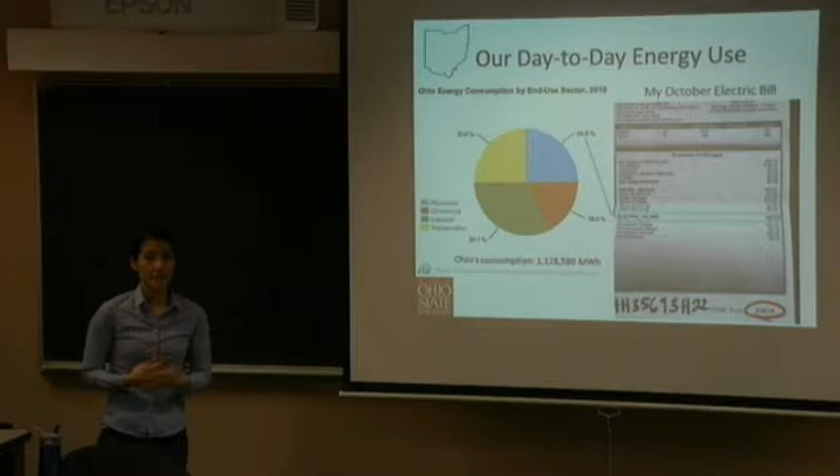And so this is my electric bill from October. And I had just moved, so it jumped from $20 to $127, right? But the key point of this is to look at the 461 kilowatt hours that I spent for the month of October. And so this is for 1 month, then you multiply it by 12, so that's roughly 10 times that. But then you do it for every person in this room, then every person on this campus, and you can see where I'm going with this, is that our energy consumption is growing and growing, and our demand is continuously growing with every person consuming energy in the form of electricity.

And this only makes up a small part of our Ohio energy consumption in terms of residential use. So then we have to take into consideration the transportation, the industrial use, and the commercial use. So in a given year, for 2010, we spent over 1 million megawatts. So megawatts versus kilowatts of electricity, right? So this sort of puts into perspective our growing energy demands. And so how does coal play a role? In Ohio, we predominantly generate electricity using coal.

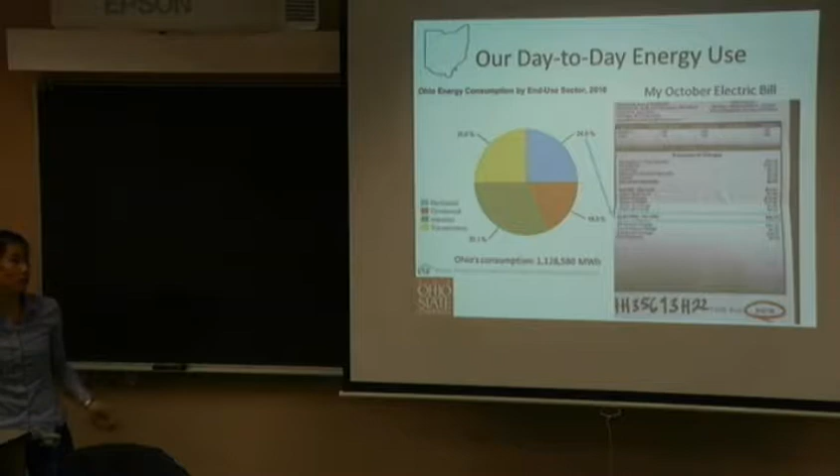And so this brings us to coal. The US has a long history with coal, with the development of the steam turbine, and basically that sparked the Industrial Revolution. Coal has been heavily used in the US. We are the second largest producer of coal after China, and currently we have a lot of reserves. So another key aspect of coal is that we have a lot of reserves, and this means that we can actually be energy independent if we make use of our coal reserves.

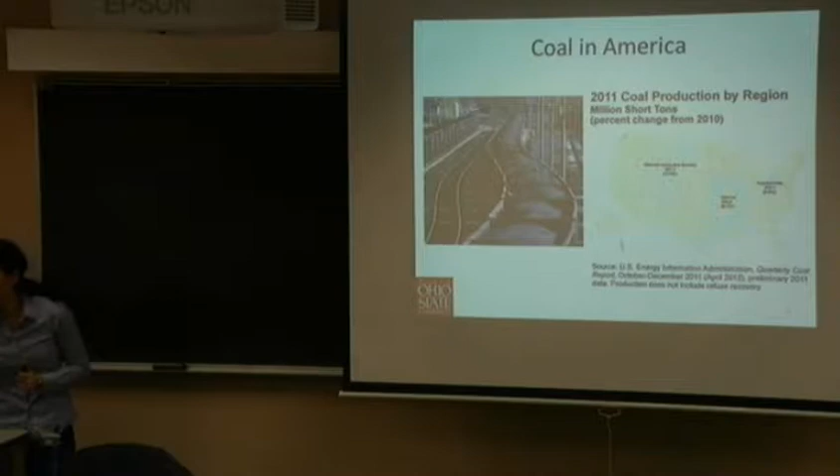But this is not to say that we shouldn't use natural gas or all the other fuel types that could make us even more energy independent. But it plays a huge role. And we currently produce as much as we consume of coal, and we are a net exporter of coal. We don't export a lot of other energy sources, but we do export coal. And we don't import very much coal, so we don't really take coal from any other country. So again, this emphasis on energy independence.

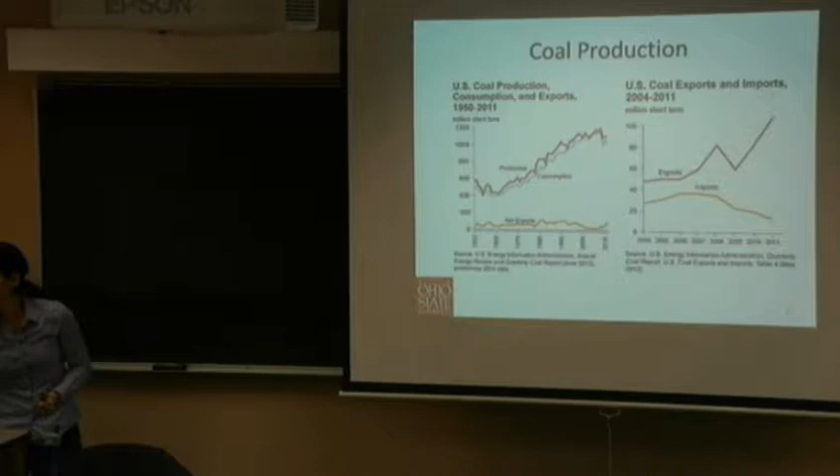But to bring it down to the state level and to us here, Ohio and coal has also had a really long and colorful history because of where we're located and the amount of coal reserves in Ohio.

I'm not from Ohio, but the first three things I think about when I think about Ohio is football. What else did I think about? Oh, how you guys would swing the elections. Yeah. And coal.

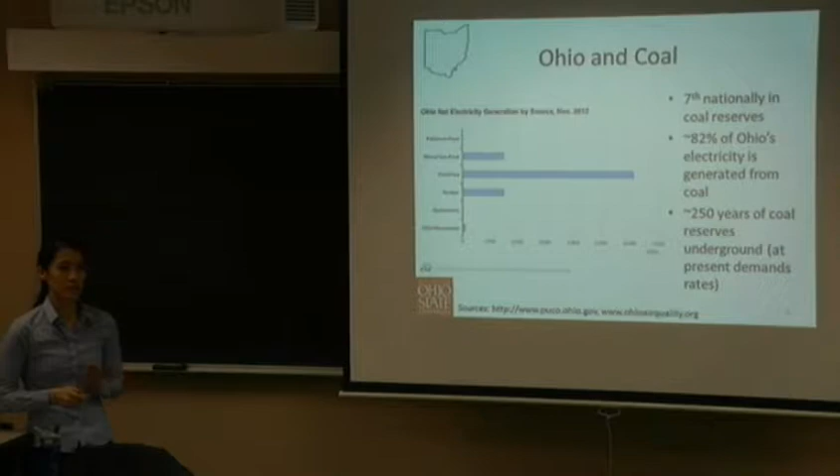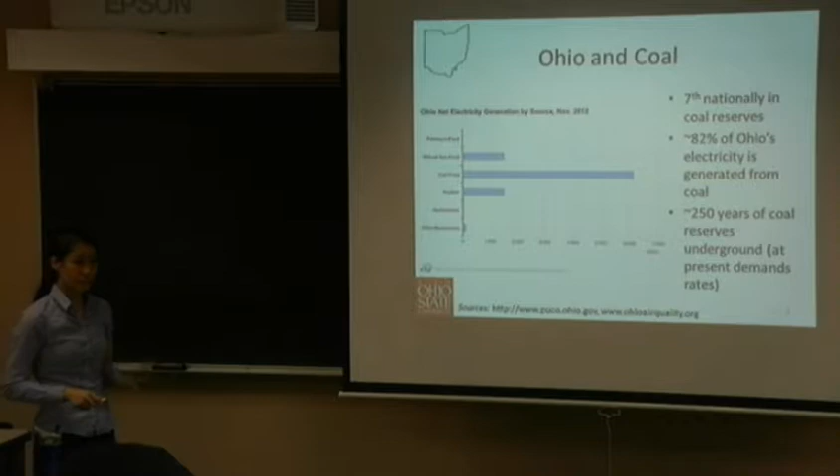Currently, Ohio is 7th in the nation in coal reserves. And most of the electricity that we use today in Ohio, at least 80% of it, comes from coal. And depending on where you get your sources, there's 100 to 300 years left of coal, and this also highly depends on how much we consume and the demand for coal. Some of our electricity comes from natural gas, some from nuclear, and then other renewables. In most projections, natural gas will increase and coal will decrease a little, but coal will remain a primary energy source for electricity.

So I like to go back to my electric bill again. But essentially, how does coal get to electricity? Coal is combusted to make steam, and the steam drives the steam turbine to produce electricity. That's really simplistic, right? And in the U.S., 42% derives from coal, but in Ohio, that's upwards of 80%. So you can see the huge reliance on coal in Ohio.

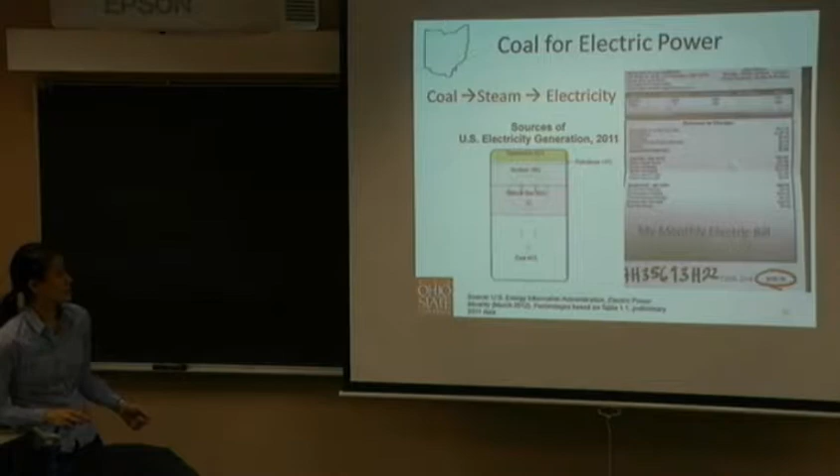But this gets to the bigger point. We use coal because it's abundant, it's cheap, it's local, and its potential to convert to usable energy is relatively efficient. I think it's 35 to 40, high 40s, depending on what type of power plant and what type of coal you use. There's a lot of different grades and a lot of different types of power plants. But that's relatively efficient for an energy source.

But what's wrong with coal, right? There's a lot of environmental concerns. And I never foresaw myself getting into the coal industry or coal research. But the reason I wanted to start working in this industry was because I have this deep belief that innovations and technological developments can produce change. And long term, we should try to address these environmental concerns, and one way is through technology.

So what are the actual environmental concerns with coal? First is coal mining. We all know it's dirty, right? You see all the black pictures of coal miners covered in soot and coal dust. Both surface and underground mining have environmental concerns. There's a huge footprint, and during the mining process, there's a potential of polluting our clean waterways and destroying the natural environment.

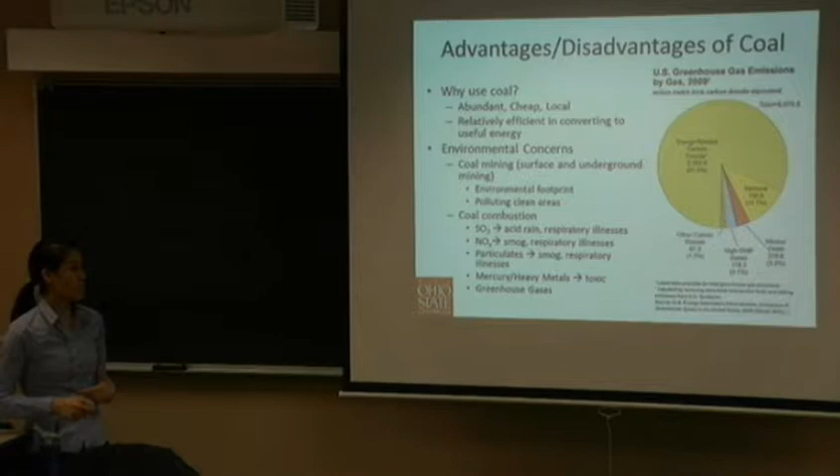And then there's also mercury and heavy metals, which are toxics and pollutants. And you don't want them in your waterways, because they affect our system, our health. And lastly, greenhouse gases, which is where the focus of today's talk will be.

So again, what is clean coal? So actually, clean coal started focusing on technological solutions for SOx, NOx, and particulate matter. Historically, clean coal was focused on developing technologies for removing SOx, NOx, and particulate matter. And it also plays a part in our environmental regulations.

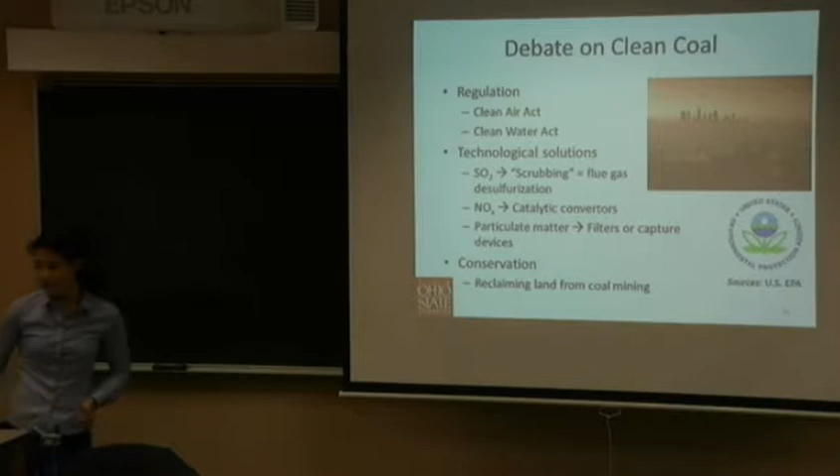So with the Clean Air Act and the Clean Water Act, which started around the late 1960s, people started paying attention to trying to clean up coal and trying to clean up our airways and our waterways. And then there's a focus on conservation. How can you reclaim the land from coal mining and reuse it or restore it back to its natural state? And so all these ideas are part of this clean coal concept. But today, more of the clean coal is focused on greenhouse gas emissions.

So I used to do research in climate change. And that was something I did in undergrad. And we've all seen it, the IPCC reports and the EPA reports about how greenhouse gases, if we continue to let them go uncontrolled, could lead to worsening of global warming and global climate change. And so how do we solve this issue?

I think carbon control has been following the SOx and NOx method. People started being concerned about SOx and NOx because they started worrying about acid rain and smog and visible environmental threats, which led to regulations and technological developments to control it.

And so these greenhouse gas technologies are following a similar route, except it's a little bit more difficult, it's a little bit more complicated, the issue is a little bit harder to envision because we don't actually physically see the effects right now. We don't see acid rain eroding our buildings, we don't see the smog. So it's a little bit more difficult to understand, I think.

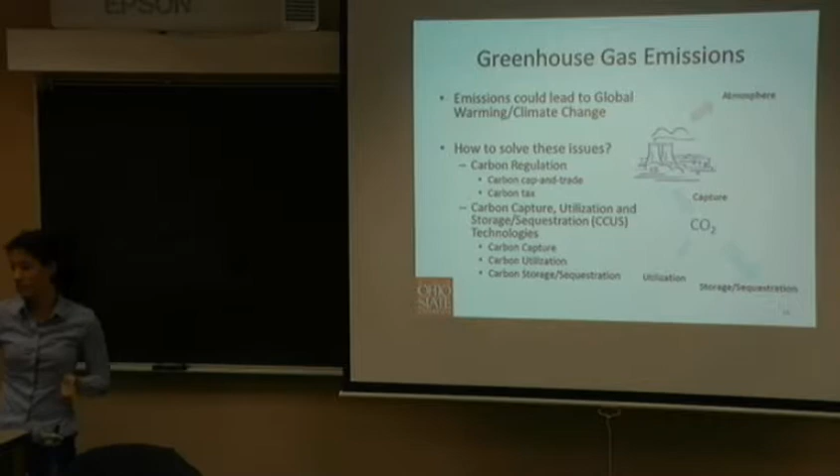So we actually emit so much CO2 that utilization will probably be overshadowed by storage and sequestration right now, because it would be really hard to use this route currently. At least that's how the technologies are developing. And so my group actually focuses on carbon capture. We don't study carbon utilization or carbon sequestration, and because it's such a big issue, there's so many different technologies. So I'll talk a lot more about carbon capture technologies in the future slides.

But a little bit of background is why not adopt the CCUS technologies now? And a lot of that is because the technology isn't ready, and also, again, back to, do we need to do this, and who's going to oversee this, and so it goes back down to there's no concrete regulation or legislation or risk management strategies currently in place.

There's no cohesive decision about whether the largest emitters should be regulating the countries that emit less, right? And so there's a lot of debate in that.

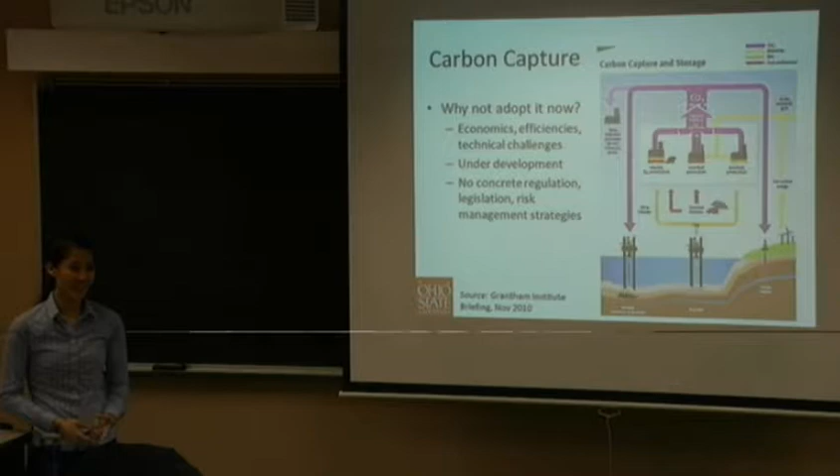And then there's issues with the technology. So there's technical challenges, there are economic challenges, and there are efficiency challenges. And I think this goes with any technology that you want to bring to commercialization. For it to actually be implemented, all of these factors have to be considered and have to actually make sense in order for someone to actually be incentivized to adopt these practices.

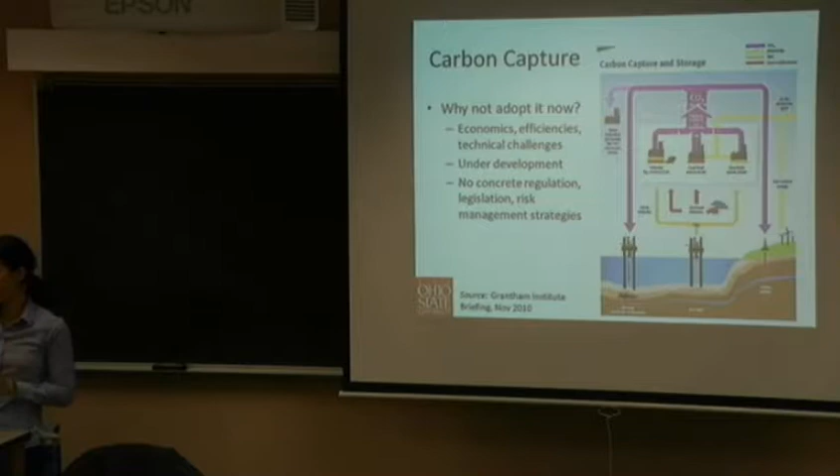And so that's what a lot of our work focuses on, is trying to make carbon capture technologies more economical, more efficient, and less technically challenging, like more simplified, more integrated. So I'm going to really quickly, briefly go over carbon utilization and carbon sequestration because I think it's important to understand the technologies or the research that's going into these fields, because it is 2/3 of the whole picture, right?

So carbon utilization is trying to use that CO2 for another purpose. And currently, the most popular method is enhanced oil recovery. That's where you take the CO2 that's been captured and you pump it down into existing wells, these are oil wells, to recover more oil. So I think research has shown that it can recover up to 20% more oil from conventional oil drilling. And so this, if it economically makes sense, would drive oil and gas producers to be more interested in CCUS technologies, right?

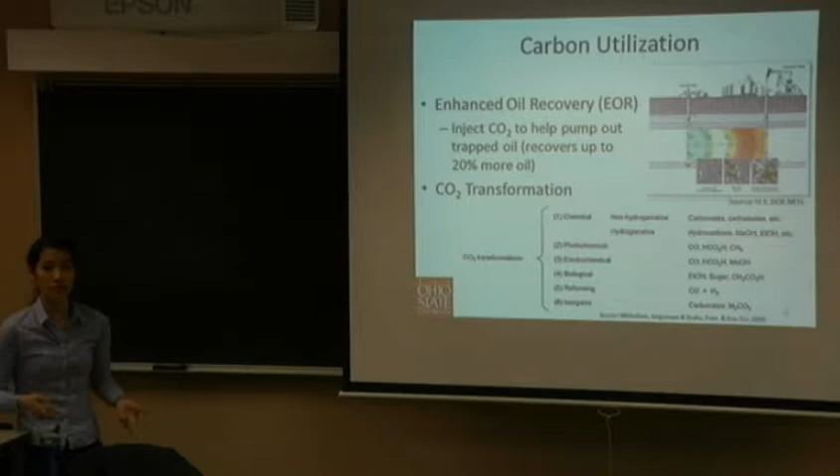And then another utilization is carbon dioxide transformation, and that's converting the CO2 into something more usable. And so there's a lot of ideas currently, mostly in chemicals, photochemical, electrochemical products, and biological products. You can reform it to syngas, or produce inorganic carbonates so you could more easily store the CO2 if it's in this mineral form.

And then we know CO2 is used in fire extinguishers. It can be used for carbonating our beverages. It can also be used as part of the photosynthesis process to promote algae growth. So that's where CO2 can be used for biofuels. So this would be another avenue to use the CO2 rather than just storing it in the ground. But a lot of this is still under research.

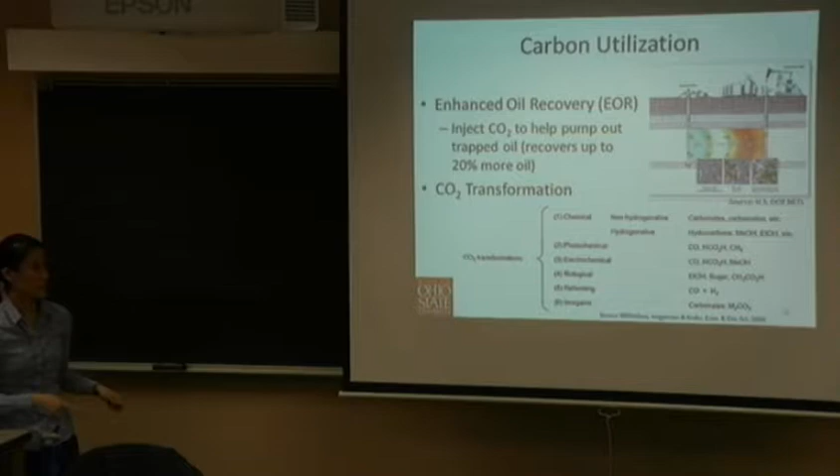And so because we do produce so much CO2, we can't use all of it. So the other option is to store it. And this is the storage, and that's basically injecting supercritical CO2, which is CO2 that's been pressurized and heated into a fluid state so it'll be easier to handle, back into empty underground reservoirs. So I think there's a lot of large-scale testing done, mostly funded by the DOE, in oil reservoirs, gas reservoirs, and saline aquifers. And so this is one option. But today I'm going to talk about carbon capture technologies, which is where most of our research is.

So carbon capture technologies are divided by how the coal is processed and where you capture the CO2. So there's post-combustion capture, which means that you allow the coal to combust, and then you take the flue gas stream and you capture the CO2 from that. And then pre-combustion is where you gasify the coal. Instead of combusting it, you gasify it to form syngas, which is a combination of carbon monoxide and hydrogen. And then you react the carbon monoxide with a little bit more water, and you push that reaction to convert the CO to CO2. And then you can separate it and store it later.

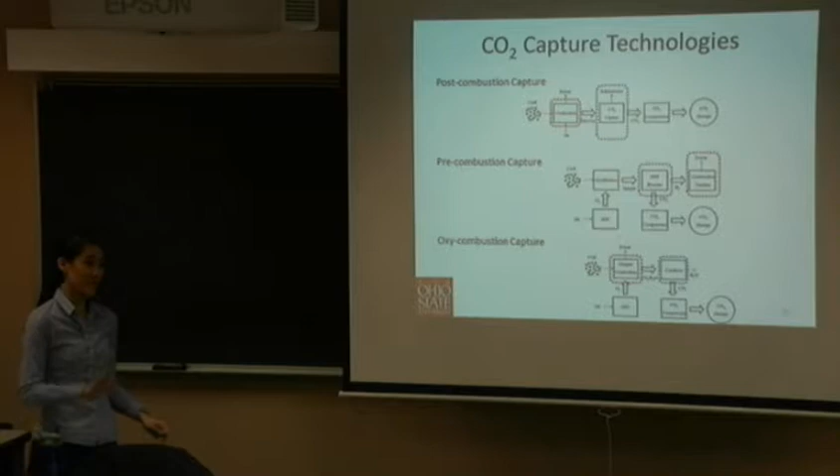And then there's oxy-combustion capture. Typically combustion is the reaction of air and coal, right? And in oxy-combustion, you take the oxygen out of the air and react that with the coal, and then capture the CO2 from that. And there are disadvantages and advantages to all of these. No one solution is 100% perfect, and I would certainly not say that our technology is 100% perfect either. But the government has been really interested in developing CO2 capture technologies because it's the first step, right? They also put a lot of funding into carbon utilization and carbon sequestration. But for this topic, I'll focus on CO2 capture.

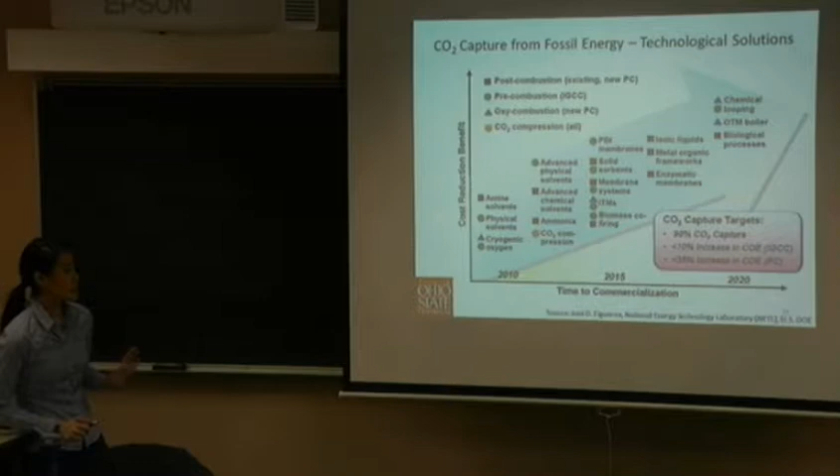So this is the DOE's timeline of technological development on CO2 capture technologies. And essentially their goal is to capture at least 90% of the CO2. I would say not all of these solutions can do that. And then do it in an economical way. A lot of reports will always report a COE, which is cost of electricity. And the goal is to reduce this increase in cost of electricity. Because if we do nothing, it's obviously not going to cost more. And so anything we adopt will add an additional cost, which is why it's not adopted right away, right? Because of this increase in costs, the coal industry doesn't have an incentive to adopt any of these technologies.

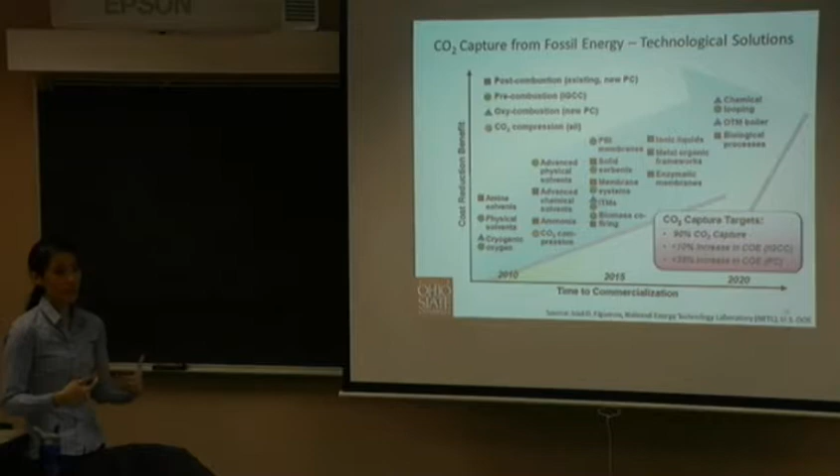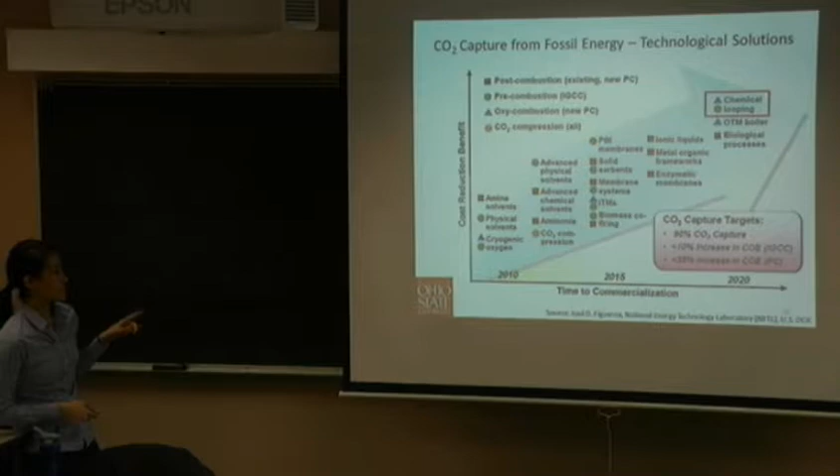And so the goal is to decrease the cost of electricity. PC is pulverized coal, and that's the conventional way of firing coal to produce electricity, in a pulverized coal fired power plant. If you can make sure the increase in cost is less than 35%, that is the goal of the Department of Energy. And so in this timeline, the most current technologies are here: amine solvents, physical solvents, and cryogenic technologies. But we study chemical looping, which is one of the more cost reducing technologies, but has one of the longest development times.

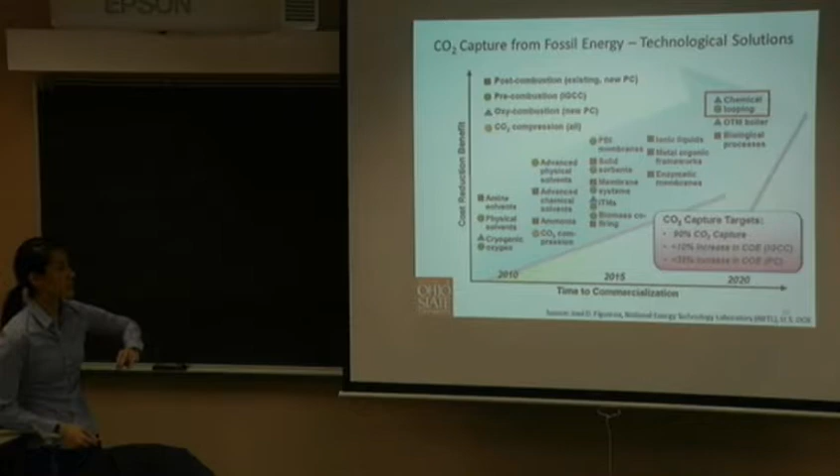And so this is actually a natural progression for my lab because my professor, Dr. Fan, started in the other clean coal technologies, which is the SOx removal, the NOx removal, the particulate matter removal. And so it became a natural progression to study greenhouse gas emissions removal from coal. The research in our lab has been ongoing in chemical looping for the past 15 years, and all our recent focus has been on that technology.

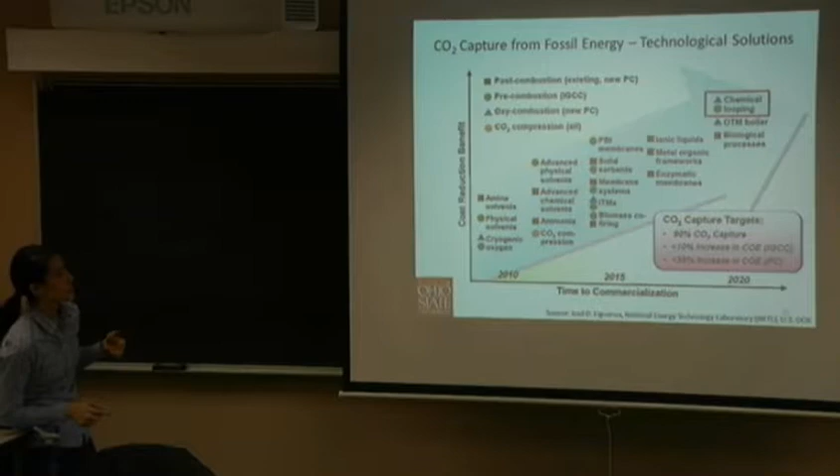We don't really study a lot of these, but it's really important to know about them, so I'm going to really quickly go over them. Oh, and one thing to note is that all of these are divided by post, pre, and oxy-combustion. Chemical looping, depending on how you use it, can be considered a pre-combustion or oxy-combustion system.

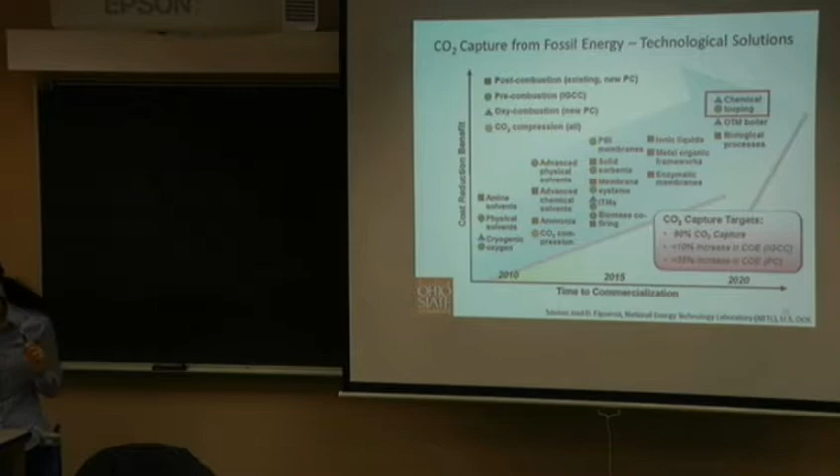So this might be a lot, but I'll go over it really quickly and briefly, and this is more for your own reference. So I'll go into pre-combustion capture, which is where you gasify the coal to form syngas, and then you can capture the CO2. The main ideas are absorption, adsorption, and physical separation.

And the difference between absorption and adsorption, let me just explain it. Absorption is more of a surface reaction, whereas adsorption is more of a bulk. No, sorry, I mixed that up. Opposite. Adsorption is where you physically adhere to the surface, and then it would let go depending on the conditions. So you would stick CO2 onto your surface and then let it go based on how you change the conditions, right? So you can swing things.

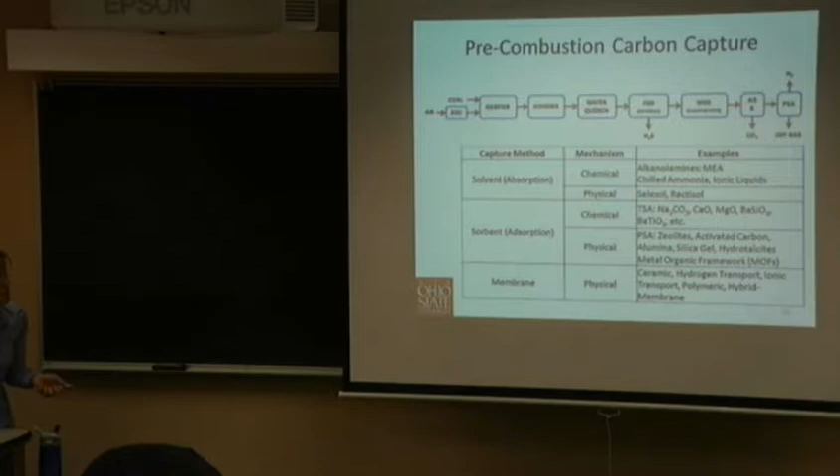And absorption is where you physically or chemically dissolve the CO2, and then you push that reaction back in order to release it. There's been a lot of research in pre-combustion carbon capture. These are the solvent absorption technologies: ionic liquids, MEA, which is also used in post-combustion, chilled ammonia, also used in post-combustion, Selexol, Rectisol, there's a lot of names. But essentially the takeaway is these are pre-combustion capture technologies.

And I think one of the things to get from this is that there are a lot of technologies out there. There is a lot of research going on in carbon capture. So which one will win out? It's hard to say. I don't really think any solution will be singular in carbon capture. Can you tier them? Like, is there a way to do one and then another and then another, on top of each other? Do you know what I'm saying?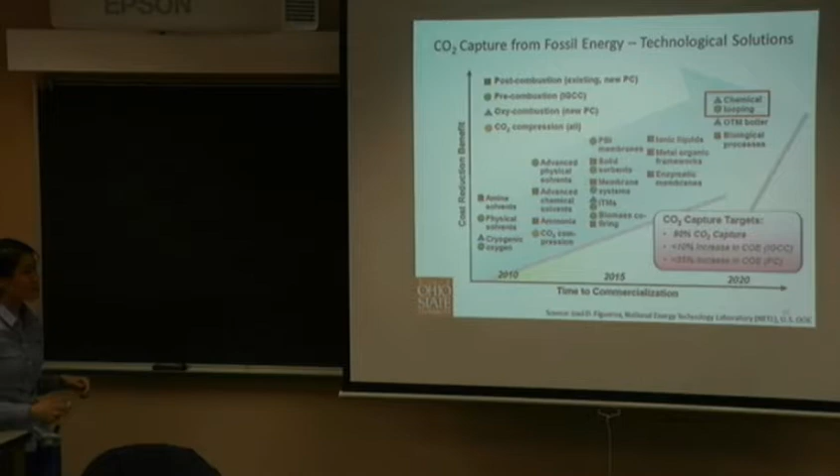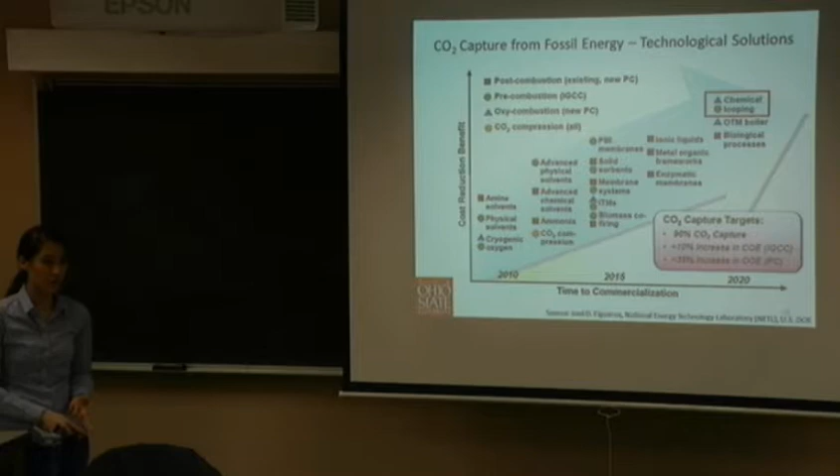Could you do physical solvents and chemical looping? I obviously have no idea what either of them are at this point. You probably could, but it also depends on how you modify it: if you retrofit a power plant, or repower a current coal-fired power plant, or need to construct a whole new system. I think it would be a little difficult to combine these two together because they're two different processes.

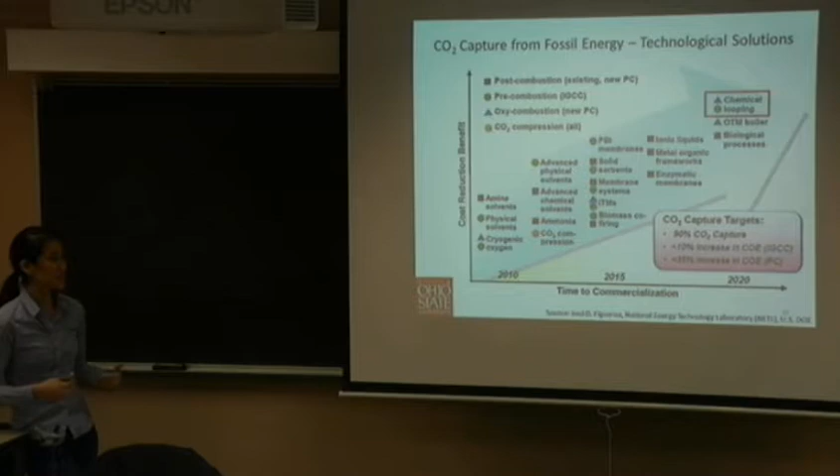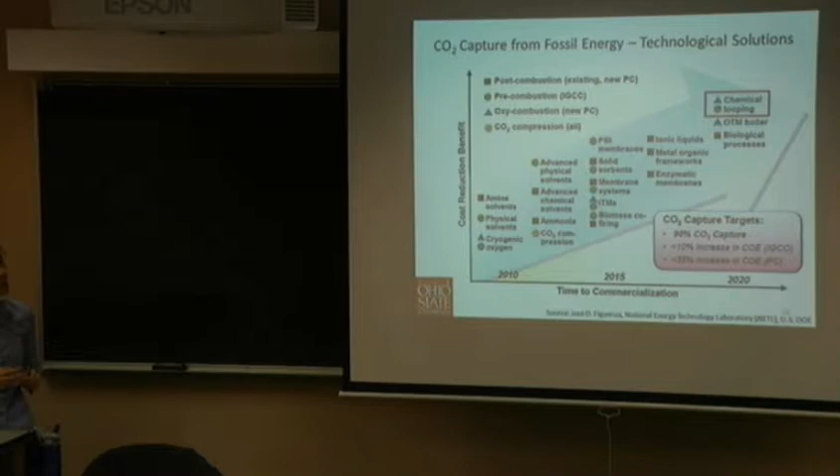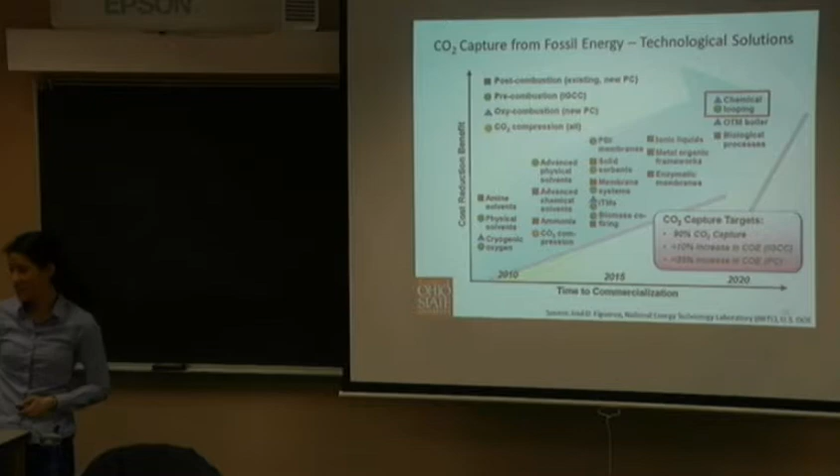Because you gasify the coal versus you just combust the coal, right? So there would be some difficulties, but I don't see why not. A lot of these technologies you could probably do sequentially. That'd be interesting, actually. Economically, probably not. Exactly. The economics is a whole different story, and I think that would be the driving reason why someone would adopt a system or not, because at the end of the day, it's about the profits for the coal industry.

So this is the second level of those pre-combustion capture technologies. We actually do research in calcium chemical looping, but today I'm going to talk about iron chemical looping, which is what's been in the news. This is a type of chemical adsorption method. And then there's also metal organic frameworks, which are also possible in post-combustion capture, and this pressure swing adsorption process.

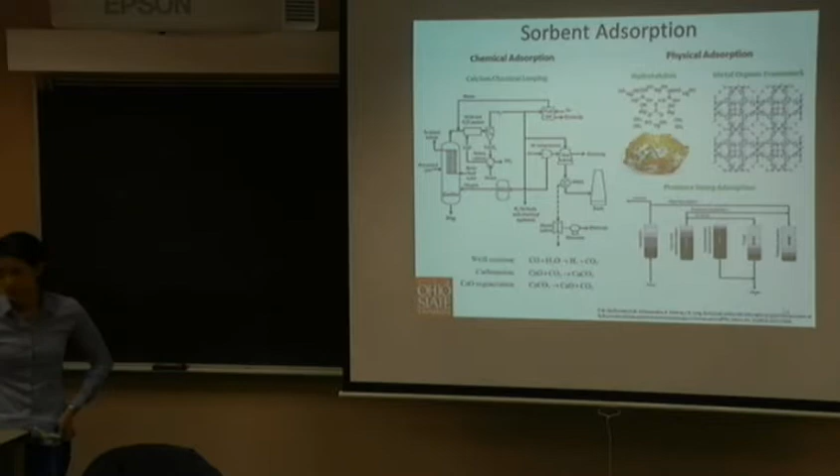And then there are people in our department, not our group, that actually do membrane separation. This is where you send in CO2 and you physically, not chemically, separate the CO2 from the flue gas stream.

Okay, so there are advantages and disadvantages. Most of them have to do with economics and the costs, the capital costs associated with building a system. And then for post-combustion, a lot of it is the energy penalties, the heat loss related to it, and then handling the solids, or handling whatever you're reacting with it, right? So I'll show you. But then there's also advantages of the system.

So I was mentioning pulverized coal or PC power plants, and traditionally coal is mixed with air, right, to produce flue gas and the heat in the form of steam. And so the most basic current carbon capture technology is this monoethanolamine. So we call it amine scrubbing for short, or MEA scrubbing. And this is a post-combustion method.

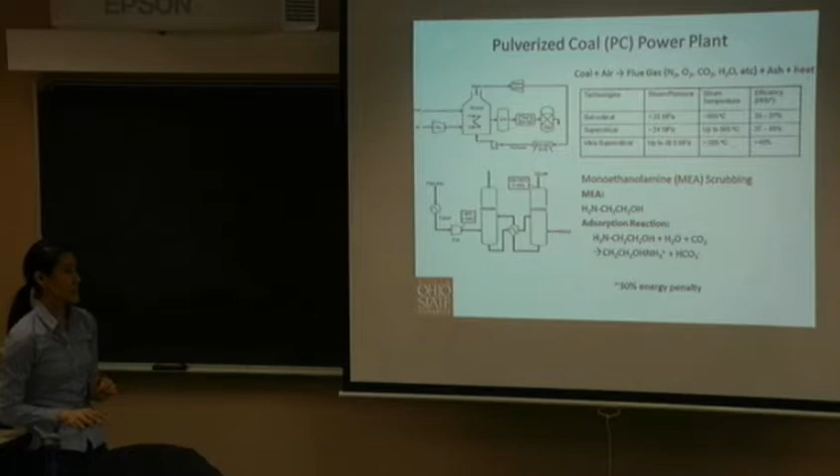So the only issue right now, back in that roadmap, is that it's very costly. There's a 30% energy penalty, and so what does that really mean? It means that if you put it in a system, it decreases the efficiency of all these coal-fired power plants. So the question is, why would a coal-fired power plant want to adopt a system that would lower their efficiency, basically lower their electricity generation potential?

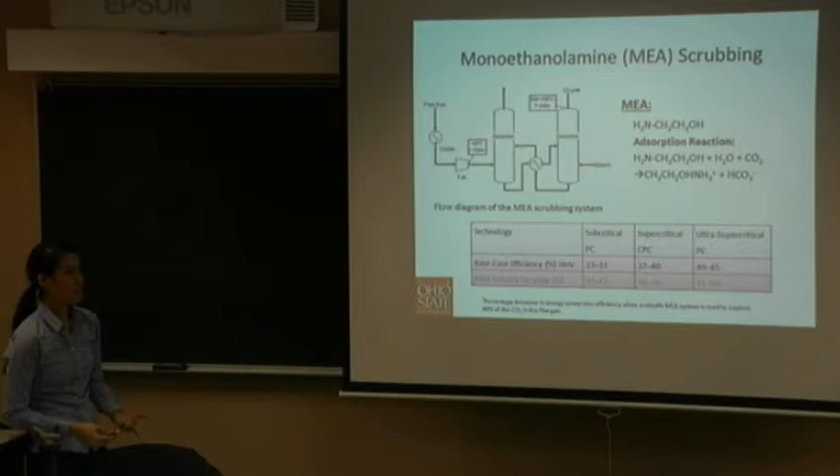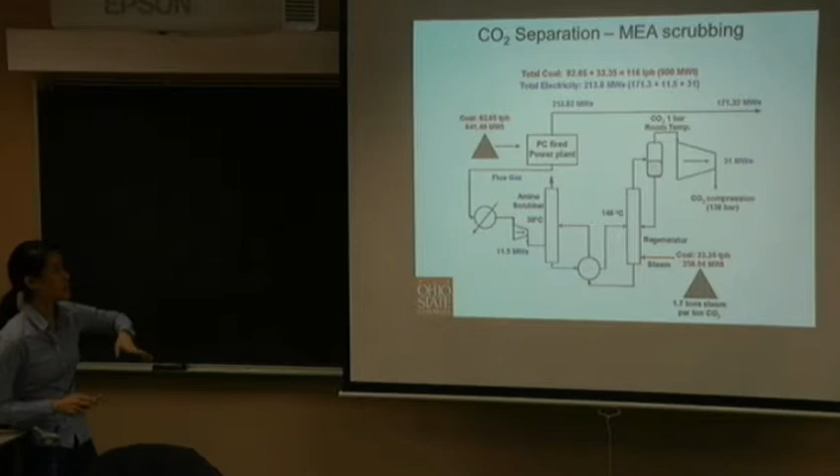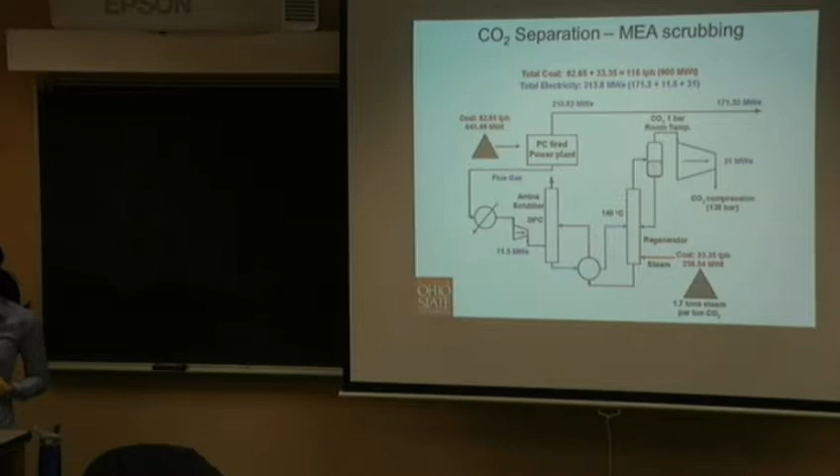And so that's why the new emerging technologies always compare ourselves to the amine process. So for people doing research in amine scrubbing, we kind of bash them. But it's the benchmark, so the DOE makes all the comparisons to the amine scrubbing process, because it would increase the cost of electricity because of the economics. And this is because the CO2 separation is very, very costly.

And so another post-combustion capture system is the chilled ammonia process. So like I said, all of these are compared to the MEA amine scrubbing process. So this is less cost intensive, and the energy penalty is less. But again, what do you do with all this ammonia?

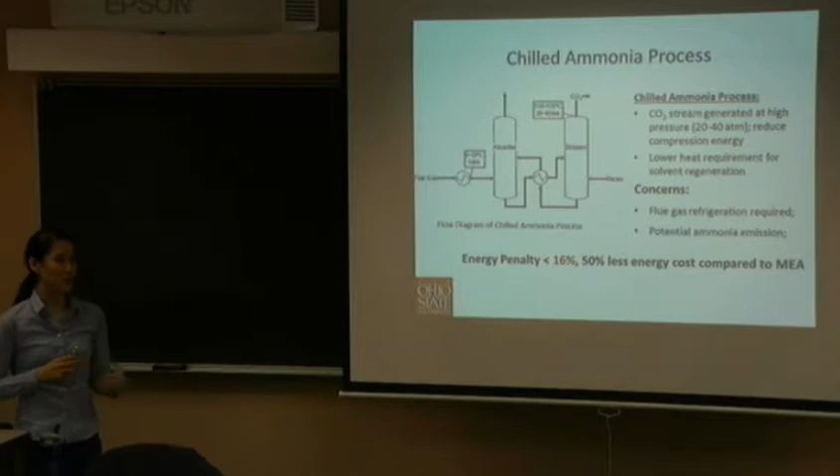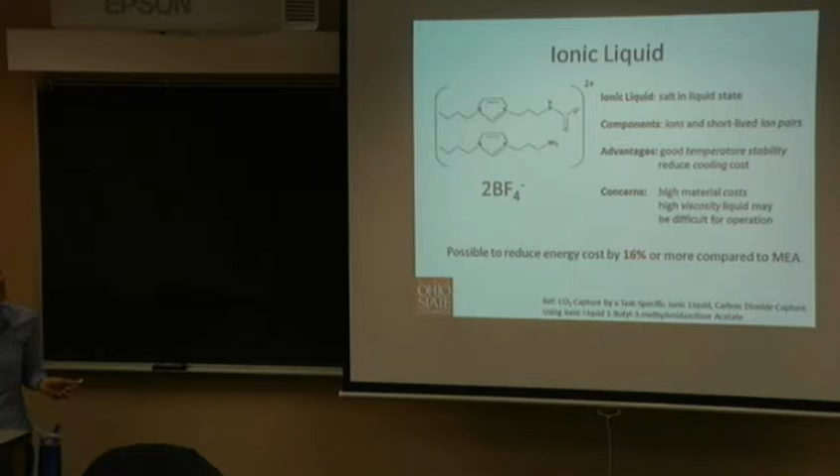And then these are the emerging technologies in post-combustion capture, which is ionic liquids, which is a salt that you react with. Currently, it's a little bit costly because some of these materials are a little bit costly to produce. Membranes, for the same reason, they're expensive. So you would need to be able to provide pressure, and in economics for these chemical processes, pressure is a big driving force, because if you can't create that pressure, your economics are not good.

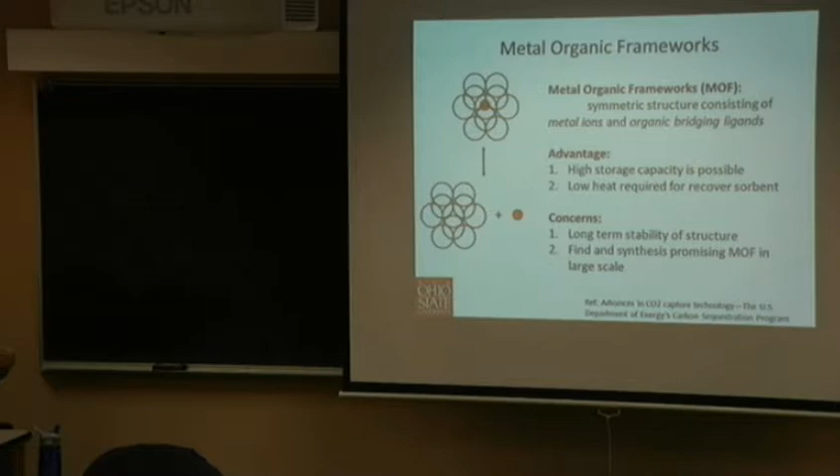And then metal-organic frameworks is a really new emerging technology, but again, it's very unclear about the large scale-up. So a lot of these are on lab scale or bench scale, which means you walk into a chemistry lab and that's the size of the current technology, and that's why scale-up will make or break these technologies.

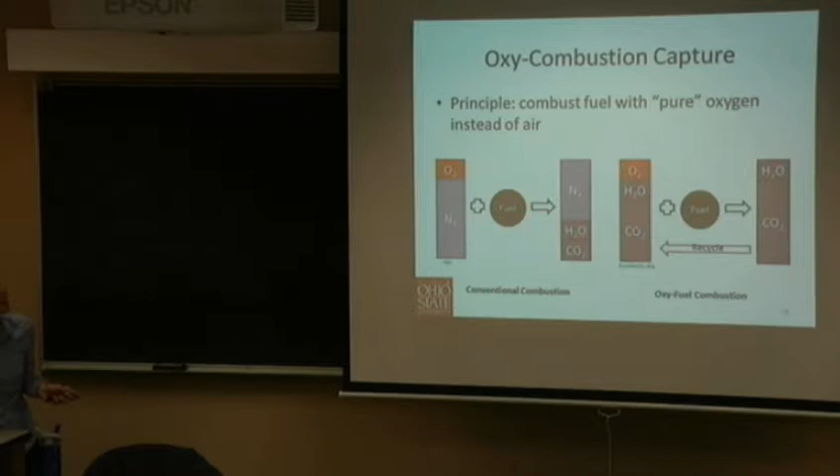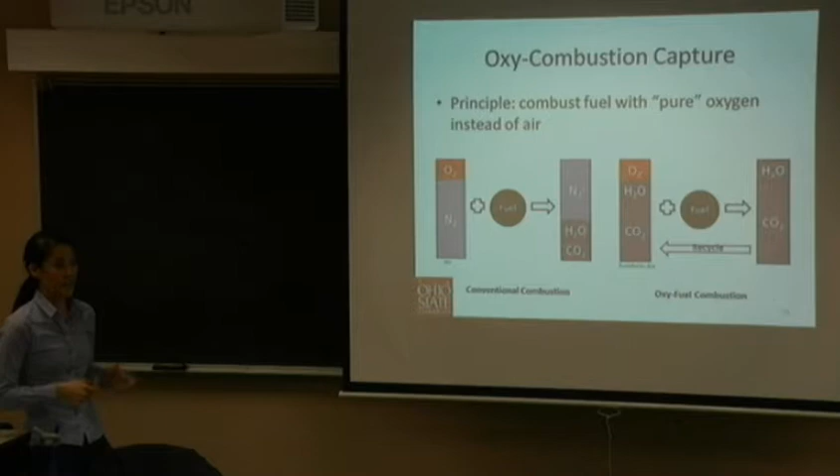Okay, and then I want to talk about oxy-combustion capture. So the principle is, the reason why conventional combustion is costly for CO2 separation is because you have gas separated from gas, which is nitrogen and CO2, and it's very difficult. It's not impossible to separate these two. But in an oxy-fuel combustion type, it's much easier if you can separate steam from CO2, because steam, you can cool it down and it becomes water, so it becomes a gas-liquid separation, and that's very easy. Or in comparison, very easy. So that's the overall principle, which is also the principle of the work we do, which is chemical looping.

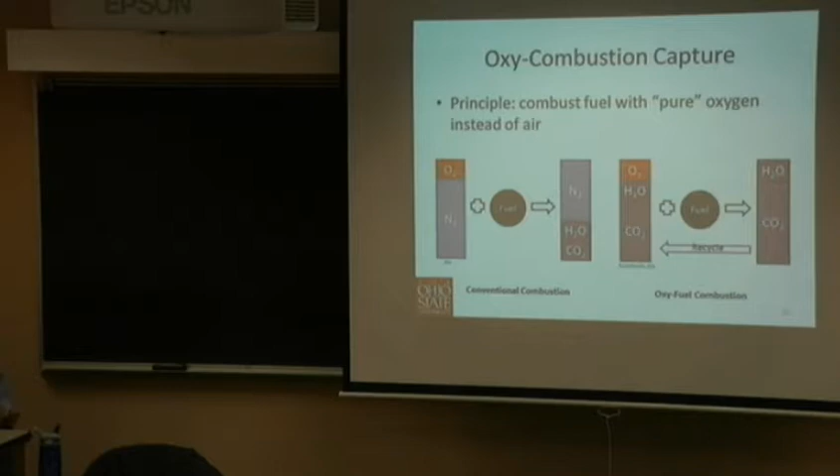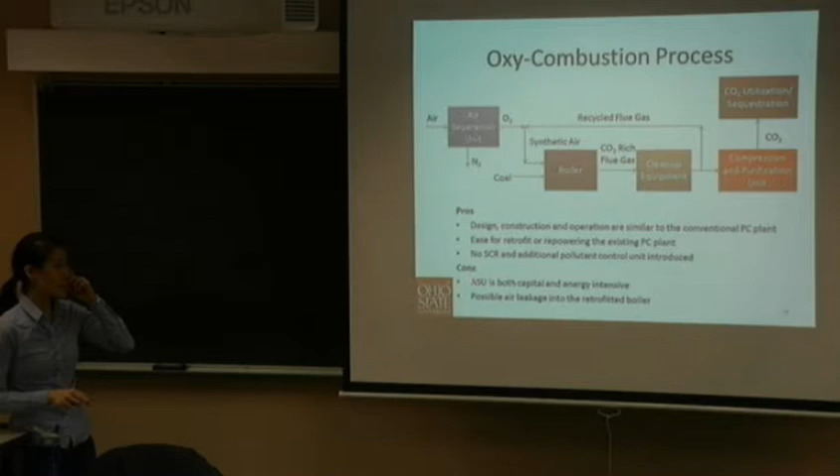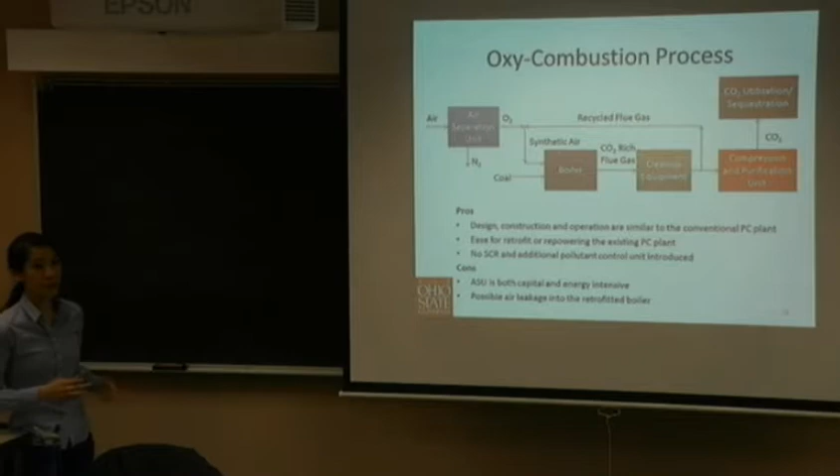So the only difference with an oxy-combustion system is that instead of reacting coal with air, you react coal with oxygen, pure oxygen. So the issue here is the economics; like I said, separating nitrogen from oxygen is really difficult. You're separating two gases. So you would need an ASU, which is an air separation unit, and those are very costly and energy intensive. So in an oxy-combustion process, that's the big disadvantage. But overall, the concept is quite simple, right? And you can easily retrofit or repower existing plants.

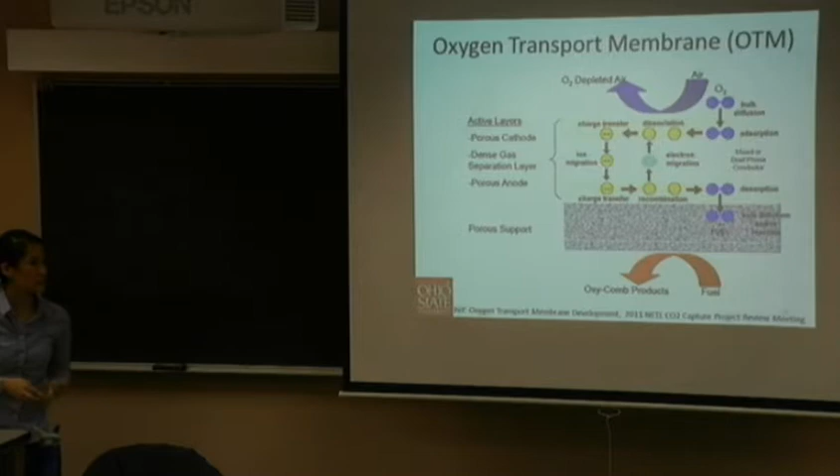So this is oxygen transport membranes as a type, but it's very new. It essentially uses a membrane to take the air and pull out the oxygen. It's very similar to chemical looping, but it uses a membrane instead. So the only issue here is it's hard to say how costly the membrane will be and how it will be scaled.

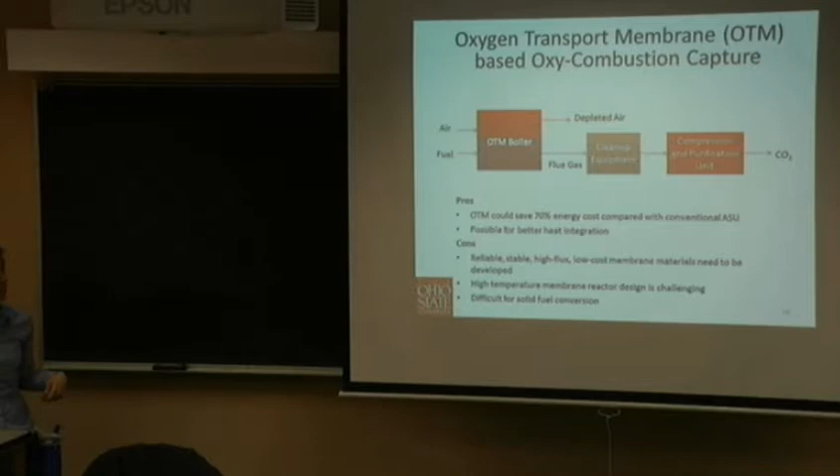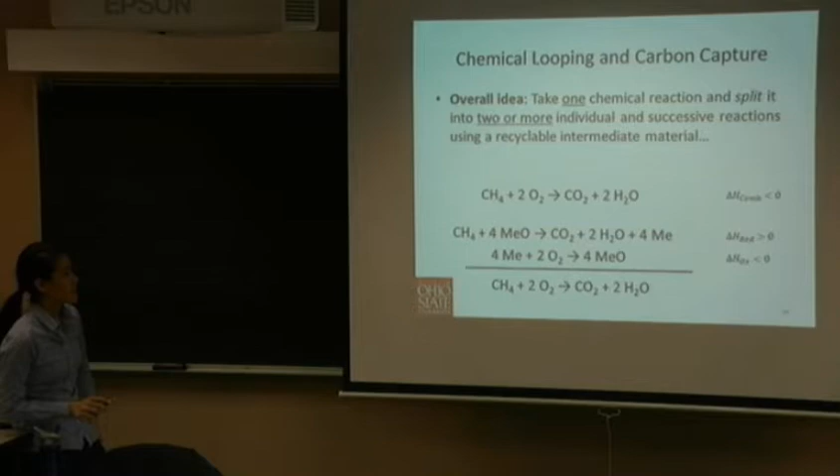So this brings us to chemical looping, which I said was a pre-combustion process, or it can be considered an oxy-combustion capture process. So the chemistry is actually very, very simple. I've used methane here, but you can think of this as any hydrocarbon: methane, propane, syngas, which is carbon monoxide with hydrogen, or coal, right? And you basically react it with oxygen, like combustion. But the oxygen comes from a metal oxide.

So I was mentioning we use calcium for a different type of chemical looping. But here we use iron, and iron has different oxidation states, and this might get a little complicated. But essentially, if you think of iron, you can think of something like rust. So when steel oxidizes, it forms a rust layer, right? That's because it reacts with oxygen. So essentially, we are utilizing that reaction of oxygen with iron.

We're taking advantage of that system, so we can reduce it and oxidize it in our reaction, which is why we use iron, because it has that potential to provide oxygen. So when you take rust and you reduce it back down to elemental iron, it releases that oxygen, and that's where we take our oxygen from.

So instead of trying to separate air, basically separate nitrogen and oxygen, we don't need to do that. We can use the oxygen from these so-called rust particles. I don't want to call them rust because they're not really rust, but they're iron-based.

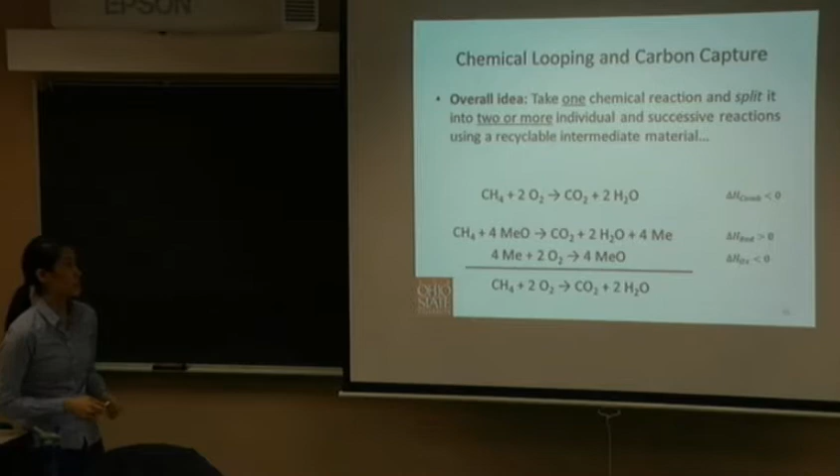Because the overall reaction is exothermic, you produce heat, which is where it plays into the role of traditional coal combustion. So the overall reaction is our carbon base with the oxygen from the metal oxide produces CO2 and only water. So it makes CO2 separation very easy because you separate a liquid and a gas.

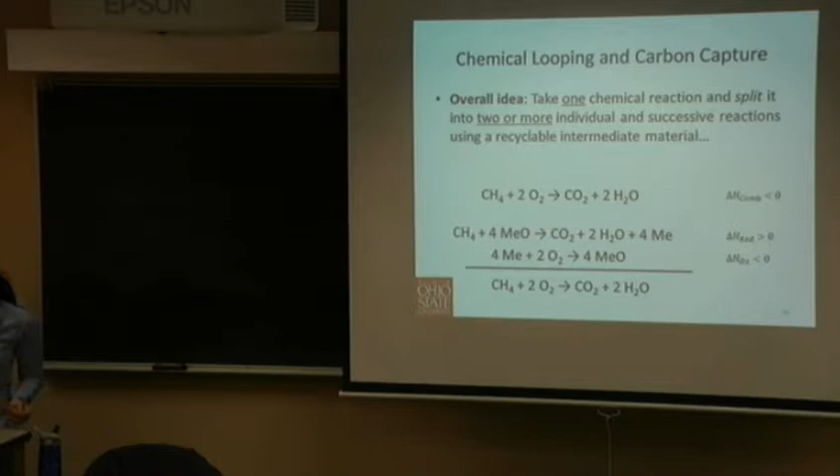And if you can see the chemistry, there's an oxidation reduction happening. In the air reactor, the metal oxide is oxidized so that it can be regenerated to go back into the fuel reactor, so it can continuously produce that oxygen. Because the coal will be sent in and reacted with the metal oxide, it takes away the oxygen, and then you're depleted of oxygen.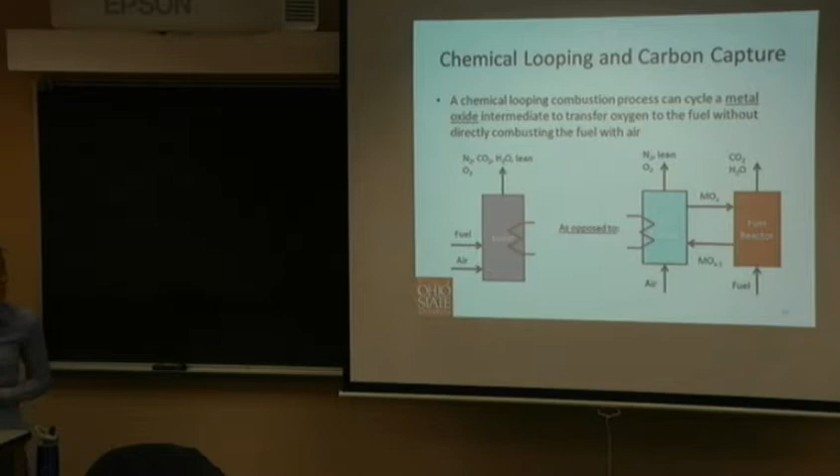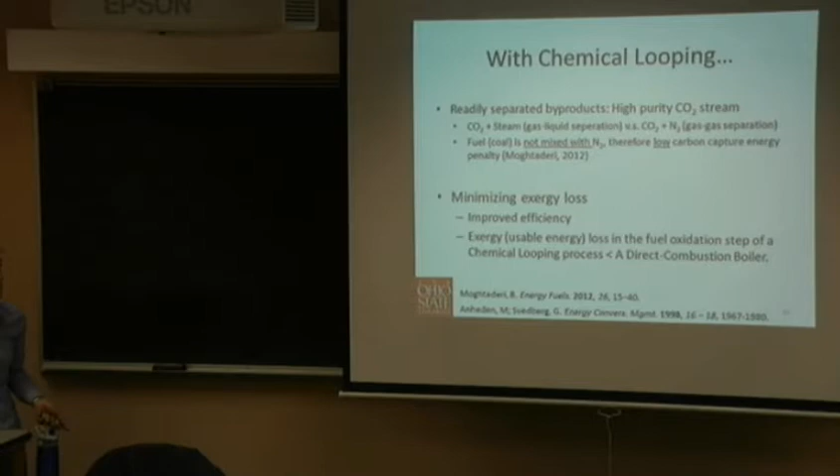So why chemical looping? You can easily separate it, and the amount of usable energy is increased because there's less energy loss, so it's more efficient than other processes. Could you go back two slides real quick? Yeah. What are the little red lines? Is that heat? Oh, yes, that's secret chemical engineering language. We had to provide heat.

Traditionally you do autothermal, so you can recycle the heat you produce back into your system, but our system is not that simple. The chemistry is very simple, but you do need to put that extra energy in. We currently don't do it autothermally; autothermally means taking the heat from our reaction. Commercially, that's the plan. We currently use heaters, but that's more of a demonstration, research. And so you can't use pure iron oxide. You have to mix it with something else.

So the important key factors of chemical looping are the challenges. This simple chemistry has been known for decades, right? But there's no incentive to actually... The original use of chemical looping was to produce CO2 for the beverage industry, carbonation, right? But they had difficulties developing a reactor system that would work, and difficulty picking out an oxygen carrier, the one that donates the oxygen. And so a lot of the work in our lab, a lot of my work, is trying to develop this perfect oxygen carrier.

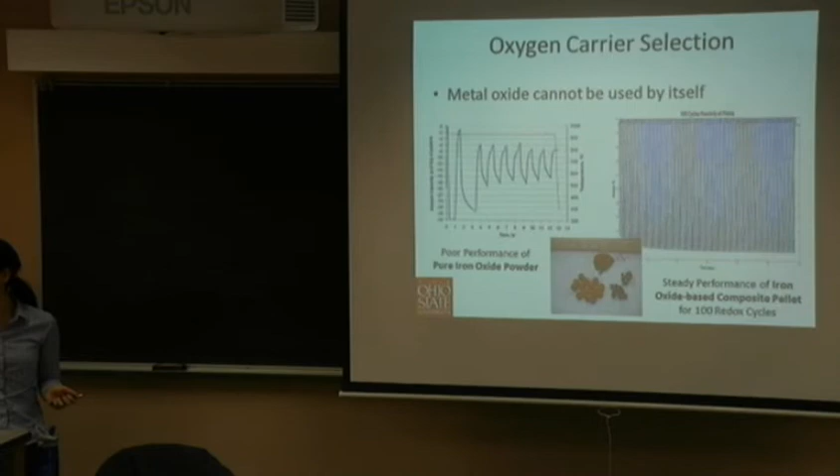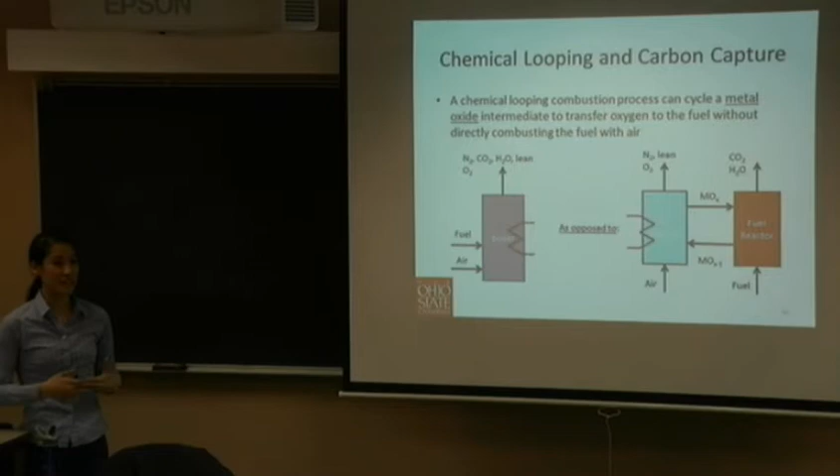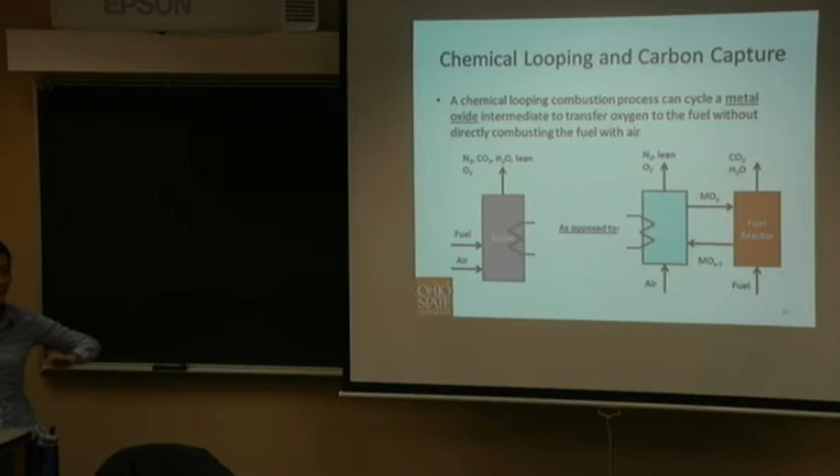So the reason we prefer not powder is because during this process, the coal becomes ash. When you burn coal, you form ash. The coal is already in powder form, and the ash is also in powder form. When you need to separate the iron oxide from the ash, it would be very difficult if they were the same size. That makes sense. But there would be more surface area with the powder, though, wouldn't there? Yes, so then your reaction would be better. It's just a difficult process. You have to find the right trade-offs.

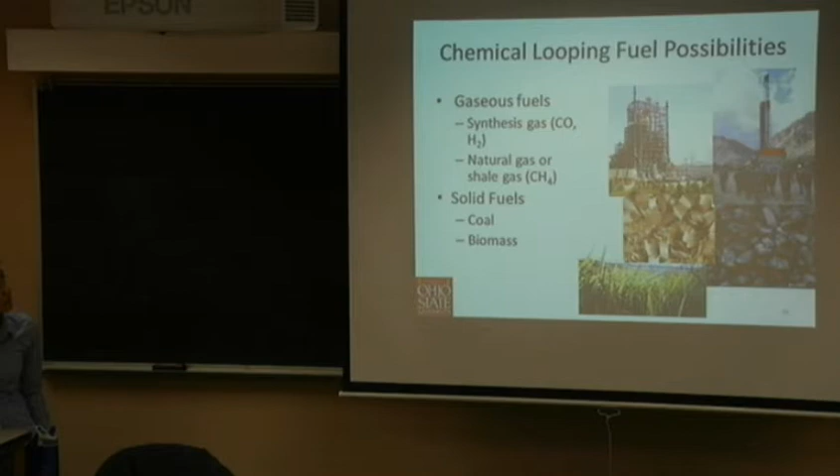So the benefits of chemical looping is that we can use syngas, natural gas, coal or biomass, so the fuel potentials are endless. It just has to be carbon-based. In my remaining 5 minutes, I'll talk about the two processes we have, which is the coal direct. We actually take coal directly in the powdered form. Most people gasify their coal before they send it in. And we have the gasified version, which is the syngas chemical looping.

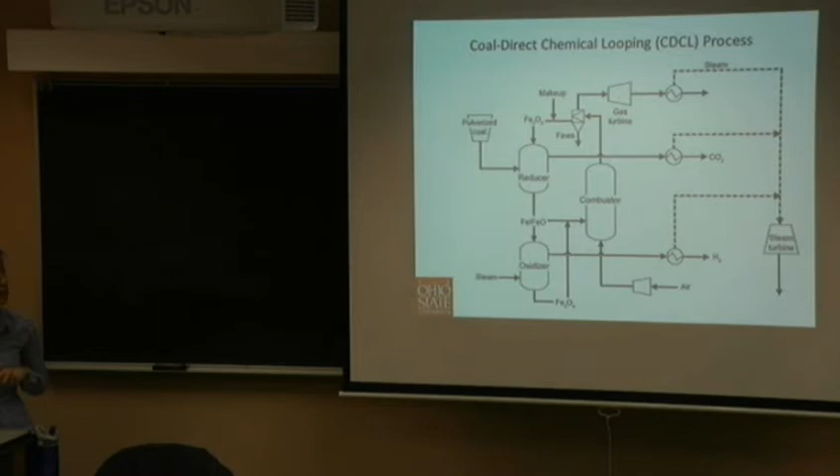So this would be where coal direct chemical looping would go in. Are we looking at a current system or your system retrofitted? Retrofitted into a system. So this would be where the boiler would traditionally be, and this is where your pulverized coal goes. So you'd have to completely replace that portion? That portion of the power plant, yeah. But let's get through these.

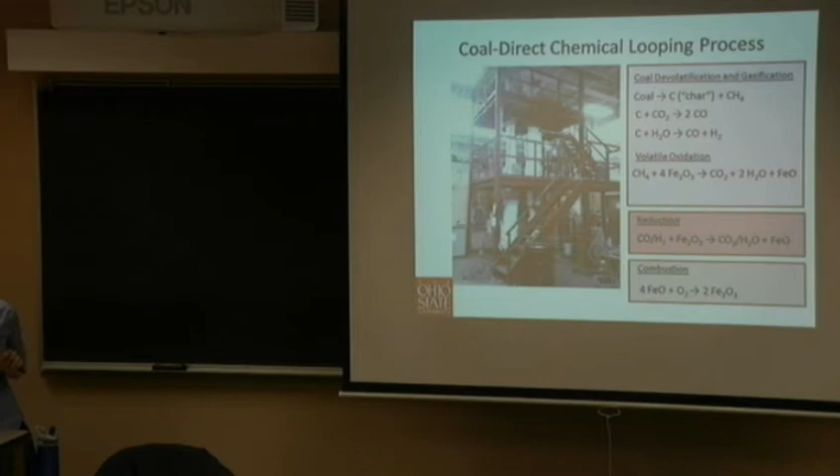The white insulated part is where our reactor system is. So it's essentially this part. We obviously don't have this half, we're only focused on developing the chemical looping part. Do you think you guys would ever go into researching that part as well? Yes, we do. Although it's probably not going to be in my graduate life. In your lifetime, maybe. It would be my lifetime, just not my graduate life.

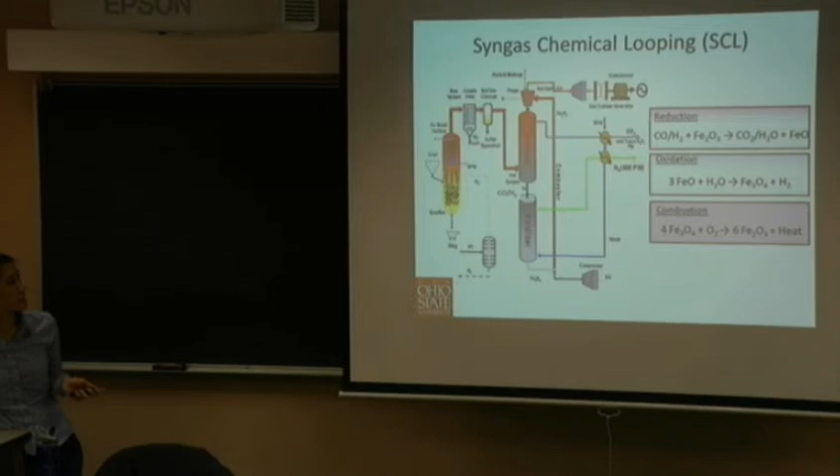And then similarly, syngas. The syngas process is the one where I'll show you where it would be tested. It all started from a very little reactor, this big. To the fixed bed, which is like this big, to a bench scale, which is that big. And then the subpilot is the 3-story one. And this is our current construction of the gasified coal system, which is the syngas unit.

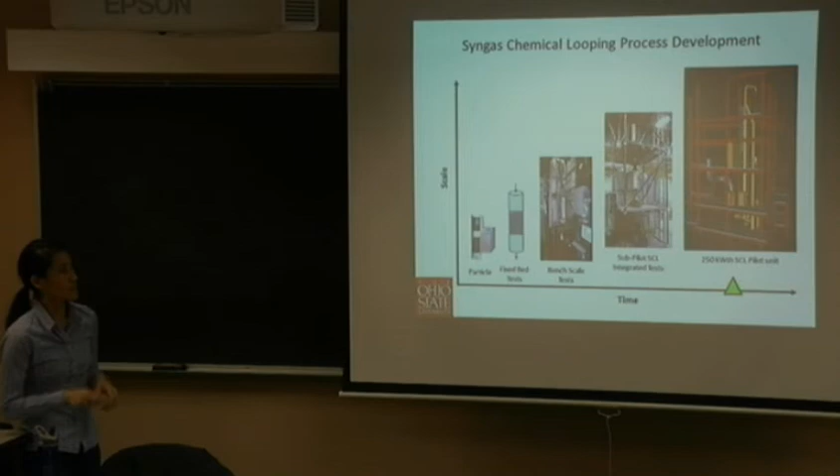It's going to be a 250 kilowatt thermal unit built in Alabama under the Department of Energy's National Carbon Capture Center, which Southern Company hosts for experimental ideas. They provide the gasified coal, the syngas stream, and we take a slipstream of their syngas to test on a larger scale. That should be starting in September, so you might hear more news about us. This slide shows how a CDCL process for hydrogen compares to a conventional hydrogen process.

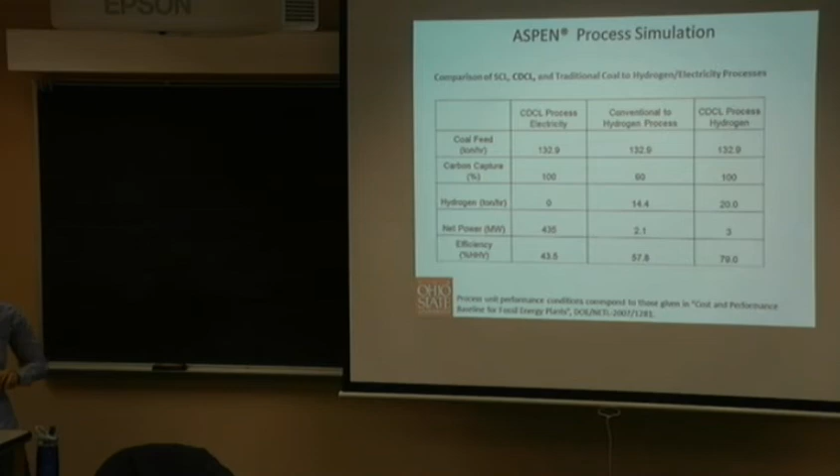You can see that you can actually produce more hydrogen efficiently. But this is simulation, so not experimental. And so we've been working with Babcock and Wilcox, who are our commercialization partners. They will use their traditional coal-fired power plants to actually test this system. Oh, cool. So that's where it comes in.

And so they've done the techno-economic studies. I don't want to bore you, but basically we concluded that if you replace the boiler part, this is where the traditional boiler would go, we only have an increase in cost of electricity of 33%, which meets the DOE's goal of 35% or less. So that's the exciting thing about our research and why we think this would be a viable technology.

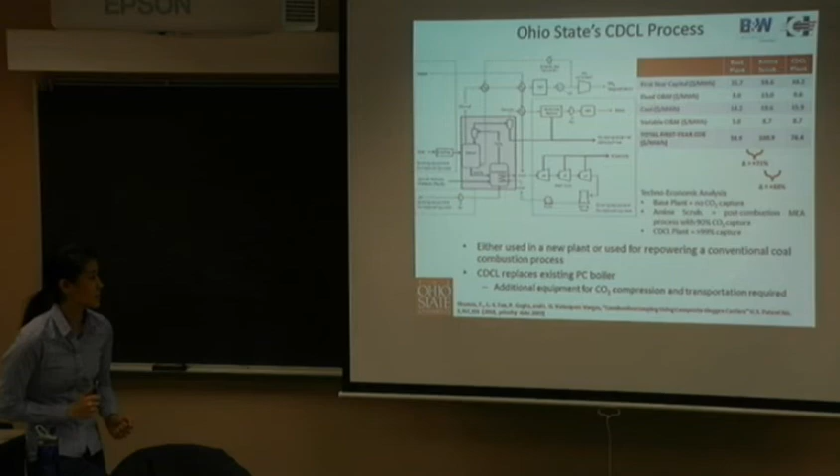And so that's pretty much it. Go back one. You said you have the 99% capture then as well? Yes. With that, right? And compared to the other ones, that's 0%. Yeah, that's significant. So not only have you met the goal, but you've basically cleaned it. Yes. We're not going to claim 100%. It'll be very difficult for any system to claim 100% carbon capture, but that's what's kind of cool.

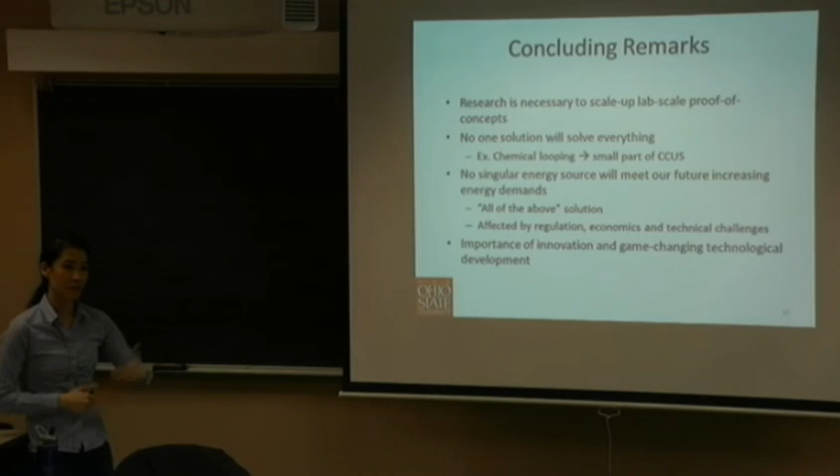Basically, my conclusion is that I think it's really important to get into technology development and innovation, and it's the only way things progress and change. I don't think coal is the only solution to our energy demands. It's an all of the above solution. Chemical looping is only a small part of the whole carbon capture, utilization, and sequestration picture, and all of these things need to be in place before something will be fully adopted, and that's where research is really important to confirm these proofs of concept and scale them up to commercialization. So hopefully that's what you learned.